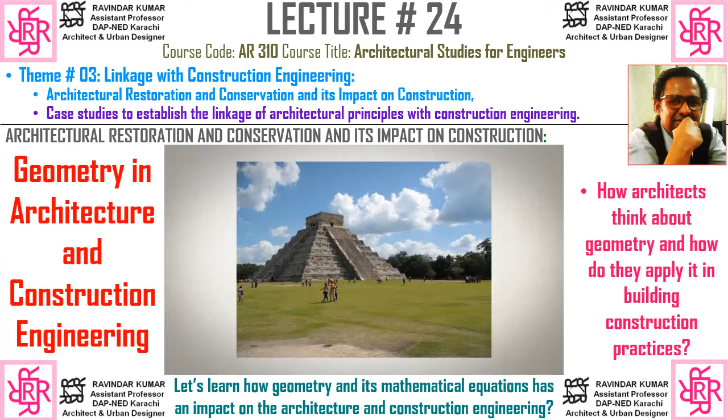The three figures of the plane: the triangle, the circle, and the square. Remember, in 2500 BC the pharaoh dreams of one of the wonders of the world, and through the creative line of the architect, the triangle becomes a pyramid, which is then repeated and redrawn throughout antiquity, the modern period, and the contemporary one.

And now the circle, a line whose points are equidistant from the center. Observe its simplicity. It draws a Ferris wheel, which becomes a landmark of the City of London, a huge mirrored cookie in Abu Dhabi, and a pile of pancakes in a new library in Sydney.

At last, the square. In a tri-dimensional world, the square becomes a cube or a cuboid. These are volumes that, through the ease of their representation, speed of calculation, and of execution, yield the most common shapes present in architecture.

However, architects' imagination didn't just limit itself to the basic polygons. Over time, architecture, geometry, and engineering weren't deprived of coming up with new shapes and setting new challenges of representation and calculation. To help us understand some fundamental curves, behold a right conical surface.

This conic surface is built based on a directrix, the circle of the base, and on the generatrix lines. Let's now section it. We position the intersecting plane, starting with a plane that will section all the generatrixes. We shall obtain an ellipse. If we straighten this plane, making it horizontal, we get a circle, which is a particular case of the ellipse.

Let's increase the incline. The intersection with a plane parallel to two generatrixes results in a hyperbola branch. If we continue to tilt the plane until it becomes parallel with the generatrix line, we obtain a parabola. A parabola is the flat curve defined as the group of points equidistant from a point and a line. It's quite simple actually. We come across this curve in everyday life, from shore to shore on suspended bridges in Portugal, the USA, and China.

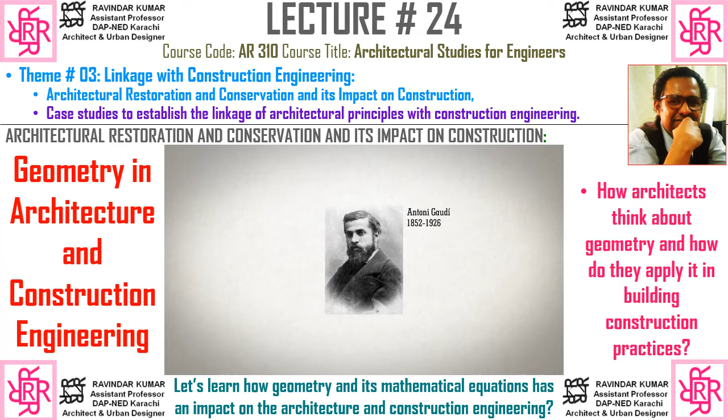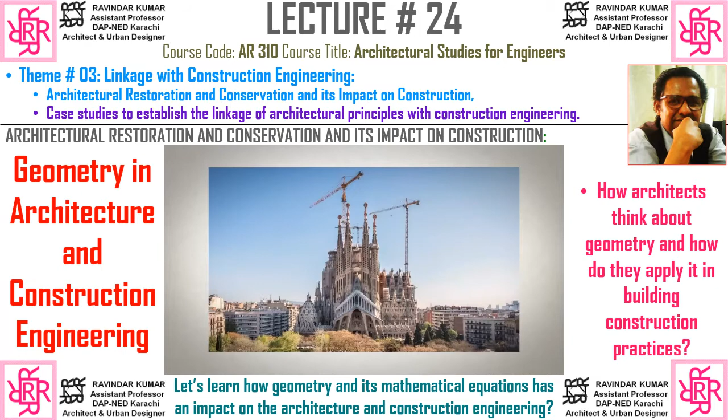Antoni Gaudí is one of the most famous architects in the history of architecture. His work primed the use of organic and naturalistic forms, which in itself set it aside from the then architectural tendencies. His greatest work of art, the Sagrada Familia, is still today, 135 years after its start, in progress. Gaudí had a passion and a knowledge for mathematics and geometry, which allowed him to develop new structural systems without recurring to calculations. He tested his stress models in scaled-down models, which he then applied in his work.

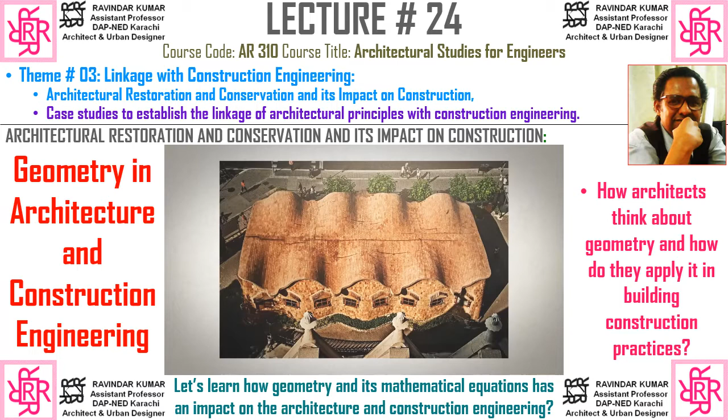Gaudí was the first architect to use conoids in his work. Presently, and in his honor, they are called Gaudí-ruled surfaces. Let's now explain how a conoid is geometrically generated. We shall use as the directrix a circumference D. We'll use a line segment E as an axis. And finally the line G will be the generatrix and shall lean on the axis and the directrix, moving through them and generating the conoid.

Let's make a second experiment. Instead of a circumference, let's use a sinusoidal directrix to generate a sinusoidal conoid, the conoid that Gaudí applied in the wall and roof geometry of the Sagrada Familia school.

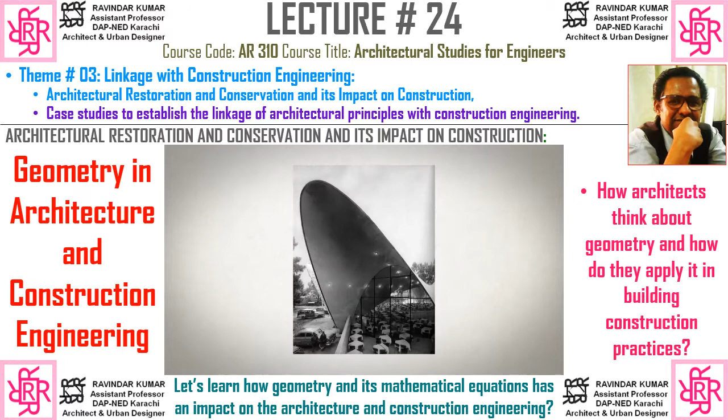Felix Candela was born in Spain, but at 26 he leaves for Mexico, where he takes up double citizenship. Candela had a special talent for geometry and a noteworthy attraction for surfaces called hyperbolic paraboloids, with which he frequently resolved his architecture. Candela sustained that the geometry of this surface generated the necessary rigidity to enable the construction of blades with minimum thickness, the so-called cascarones.

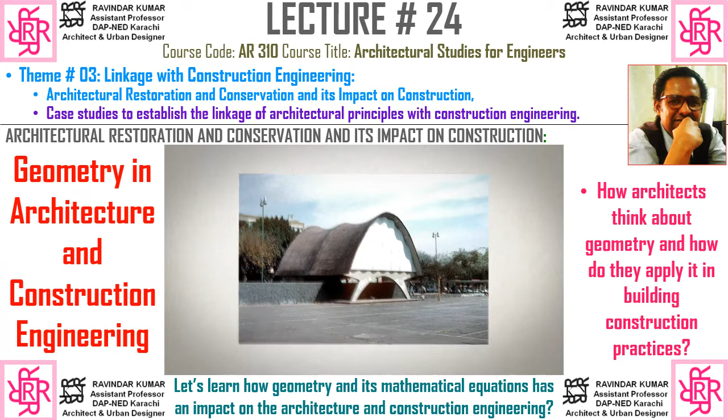Built in 1951, the Cosmic Rays Pavilion, a small laboratory in Mexico City, was his first work employing this surface. This membrane of concrete was only 1.5 centimeters thick.

So what is a hyperbolic paraboloid? Well, we'll need two non-coplanar lines, R1 and R2. Let's run a third line, G, through the other two. Now all we have to do is move the G line at constant speed through the R1 and R2 lines, obtaining the twice-ruled surface.

The hyperbolic paraboloid name is due to the fact that it has both hyperboles and parabolas as sections. Let's see. By sectioning this surface with the horizontal plane, we obtain curved lines which we verify as being hyperboles. Intersections with right planes will render parabolas.

Let's return to those three projects, Niemeyer, Gaudí and Candela, and our initial question. So after all, the answer that seemed apparent wasn't. The three buildings are in fact curved surfaces. True. But in history, we have just witnessed that these curved surfaces in particular are ruled. They are surfaces capable of being generated by lines.

In architecture, shapes, geometry and formulas entwine naturally from the idea to the construction. Mathematics is not an abstraction disconnected from reality, but a vehicle of the project. The creative design needs shape and rule. It needs a language that can provide its representation, calculation and execution. It needs geometry and equations.

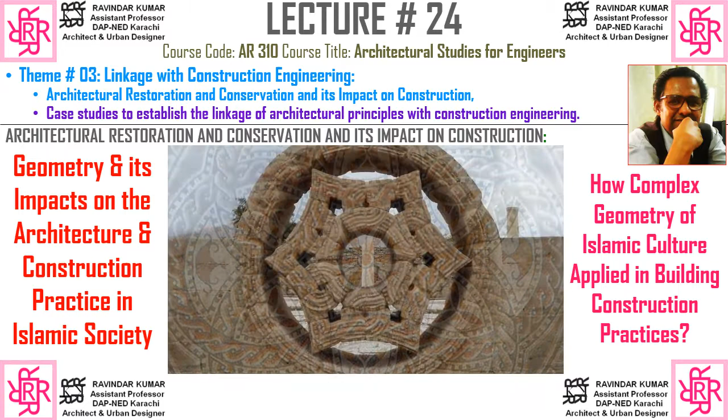This tradition began in the 8th century CE, during the early history of Islam, when craftsmen took pre-existing motifs from Roman and Persian cultures and developed them into new forms of visual expression. This period was a golden age of Islamic culture, during which many achievements of previous civilizations were preserved and further developed, resulting in fundamental advancements in scientific study and mathematics.

Accompanying this was an increasingly sophisticated use of abstraction and complex geometry in Islamic art, from intricate floral motifs adorning carpets and textiles to patterns of tilework that seemed to repeat infinitely, inspiring wonder and contemplation of eternal order.

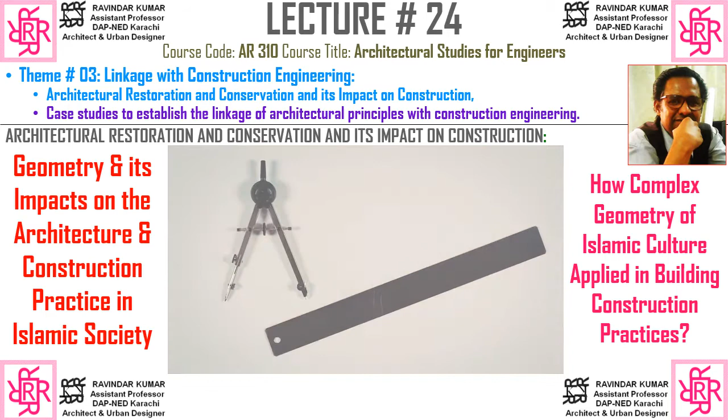Despite the remarkable complexity of these designs, they can be created with just a compass to draw circles and a ruler to make lines within them. And from these simple tools emerges a kaleidoscopic multiplicity of patterns. So how does that work?

Well, everything starts with a circle. The first major decision is, how will you divide it up? Most patterns split the circle into 4, 5, or 6 equal sections, and each division gives rise to distinctive patterns.

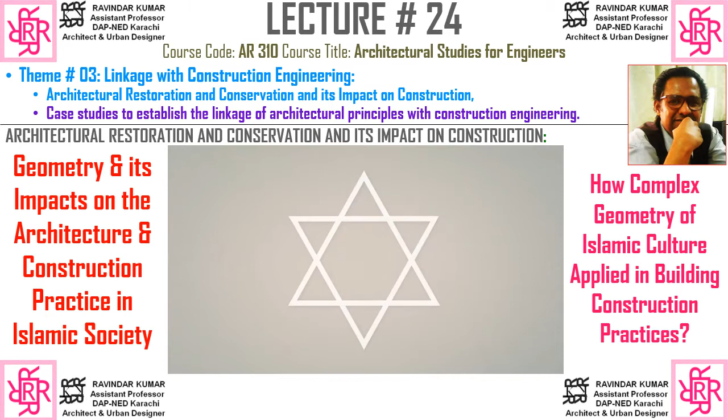There's an easy way to determine whether any pattern is based on 4-fold, 5-fold, or 6-fold symmetry. Most contain stars surrounded by petal shapes. Counting the number of rays on a starburst, or the number of petals around it, tells us what category the pattern falls into. A star with 6 rays, or surrounded by 6 petals, belongs in the 6-fold category. One with 8 petals is part of the 4-fold category, and so on.

There's another secret ingredient in these designs: an underlying grid. Invisible but essential to every pattern, the grid helps determine the scale of the composition before work begins, keeps the pattern accurate, and facilitates the invention of incredible new patterns.

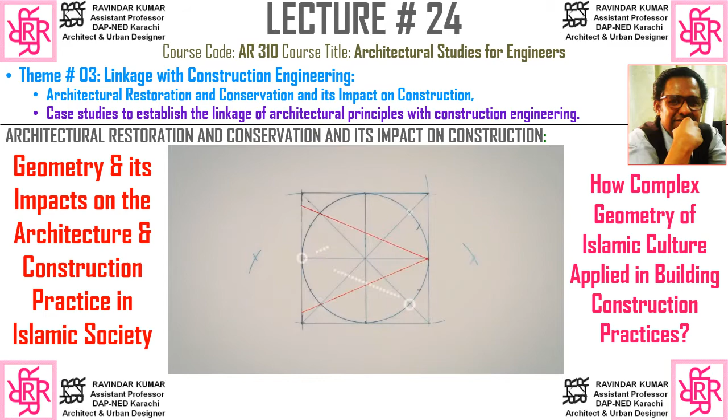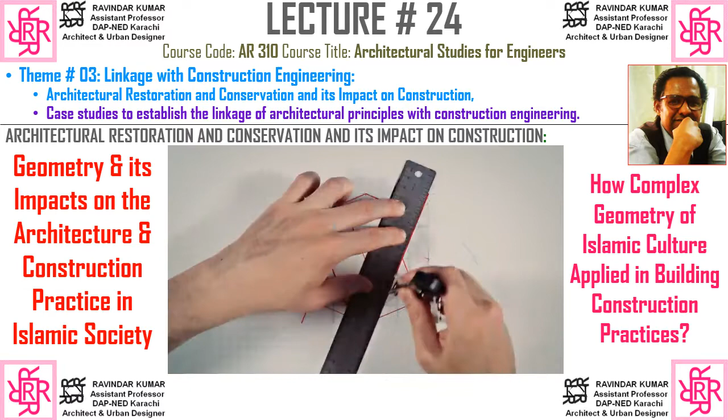Let's look at an example of how these elements come together. We'll start with a circle within a square and divide it into 8 equal parts. We can then draw a pair of crisscrossing lines and overlay them with another 2. These lines are called construction lines, and by choosing a set of their segments, we'll form the basis of our repeating pattern. Many different designs are possible from the same construction lines, just by picking different segments.

The full pattern finally emerges when we create a grid with many repetitions of this one tile, in a process called tessellation. By choosing a different set of construction lines, we might have created this pattern, or this one. The possibilities are virtually endless.

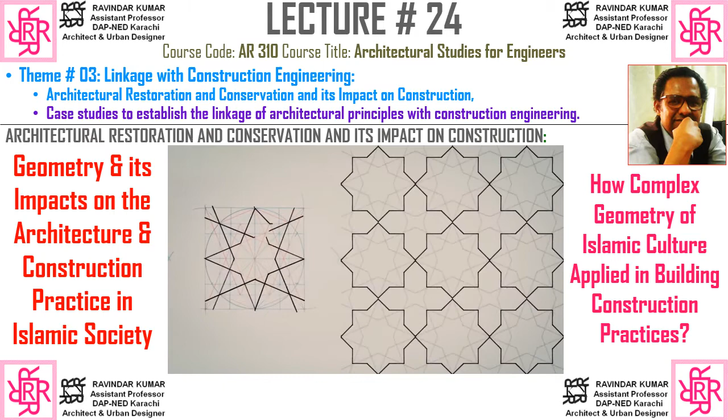We can follow the same steps to create six-fold patterns. By drawing construction lines over a circle divided into 6 parts and then tessellating it, we can make something like this. Here's another six-fold pattern that has appeared across the centuries and all over the Islamic world, including Marrakesh, Agra, Konya, and the Alhambra.

4-fold patterns fit in a square grid, and 6-fold patterns in a hexagonal grid. 5-fold patterns, however, are more challenging to tessellate because pentagons don't neatly fill a surface. So instead of just creating a pattern in a pentagon, other shapes have to be added to make something that is repeatable, resulting in patterns that may seem confoundingly complex but are still relatively simple to create.

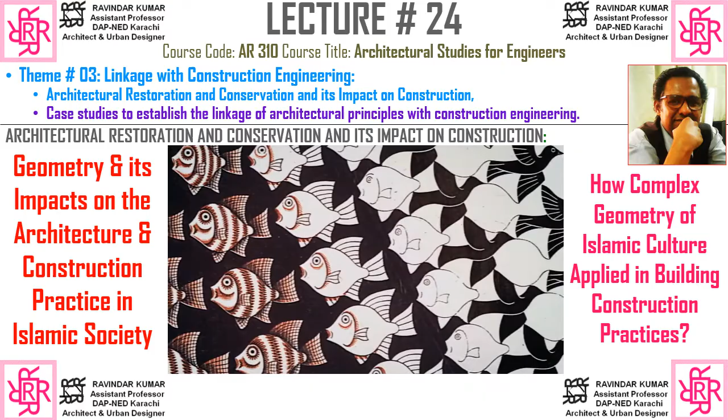Also, tessellation is not constrained to simple geometric shapes, as M.C. Escher's work demonstrates. And while the Islamic geometric design tradition doesn't tend to employ elements like fish and faces, it does sometimes make use of multiple shapes to craft complex patterns.

This more than 1,000-year-old tradition has wielded basic geometry to produce works that are intricate, decorative, and pleasing to the eye. And these craftsmen prove just how much is possible with some artistic intuition, creativity, dedication, and a great compass and ruler.

So you have seen how geometry has affected the overall patterns in the buildings, and construction of these patterns is very important to be understood by construction engineers. There is a great impact of Islamic geometrical patterns on architecture and construction engineering practice in Sindh, and we can see some examples of it.

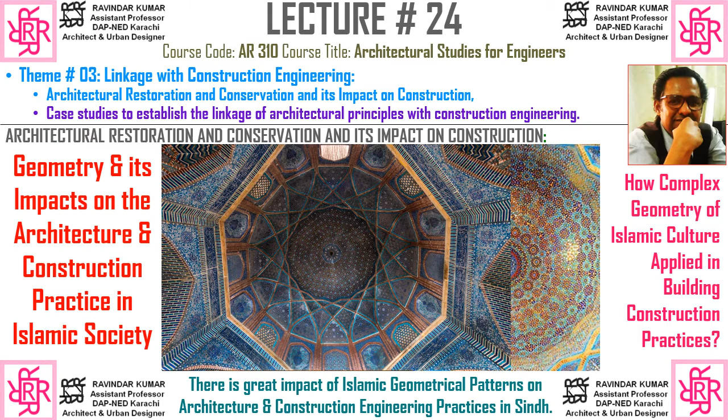I can give you so many examples from Sindh where you find this kind of architecture, and the internal spaces are decorated and designed in a manner that geometry is very much applicable in our local context.

Let's look at another example: the case study of building a Moroccan court. We will understand how construction engineering practice has a profound impact on architectural restoration and conservation. There are specialized construction engineers and families who work in this field, and whole families dedicated to such projects. Let's see this case study to understand what I'm talking about.

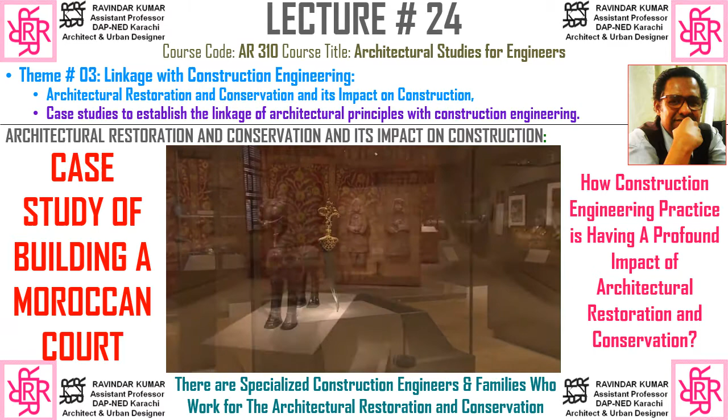In 2011, the Metropolitan Museum of Art opened new galleries for its Department of Islamic Art. As a curator, I knew our visitors would experience extraordinary works of art created over the last 1400 years. But we also wanted to give visitors an experience of space and architecture, and to show something of the living traditions in the Islamic world.

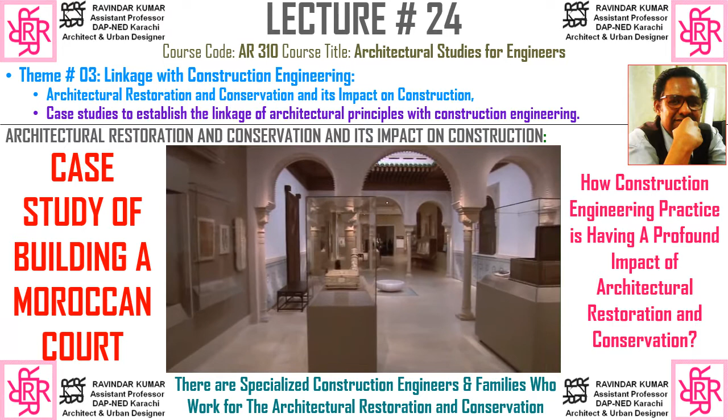The result is the Patti Cadby Birch Court, a Moroccan court built inside the Metropolitan Museum over several months in 2011. It took a team of experts, from curators and historians to designers and craftsmen, to make the Moroccan court using traditional methods that go back to the 15th century.

Our work began with a journey to Fez. The world has changed so much and traditional crafts are dying out very fast. But to the credit of the Moroccan government, they've taken this so seriously over the years that they've managed to preserve in Fez and other centers the traditional methods.

Being so close to the moment of creation has an incredible power, and it's something that profoundly moves you as a curator.

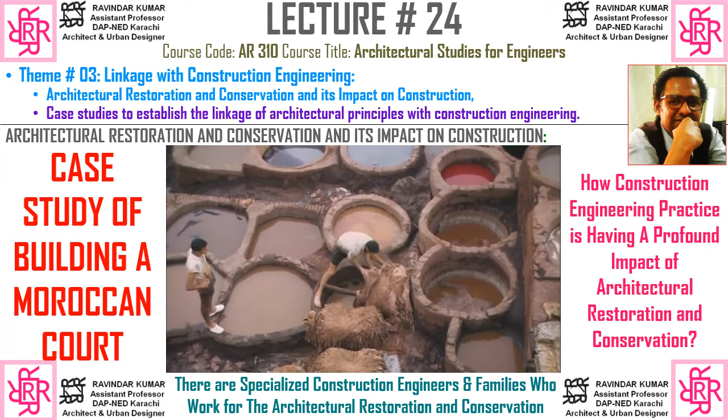In Fez, there were 40,000 craftsmen. We met with many guilds and many groups, and found potential to work with a number of different people. However, it was when we met the Naji family craftsmen, run by four brothers and their father, with several workshops in Fez itself,

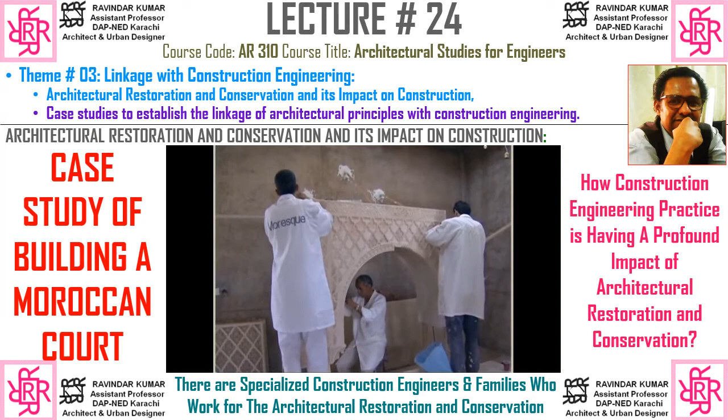that at one point Rida picked up Muhammad's hand and said, 'Look, this is my brother's hand.' We looked at that hand, and it was the hand of a craftsman. It was rough and calloused, and had plaster all over it. He'd been chipping away since the age of 14. It was one of those moments when you just felt this was the right partner for you.

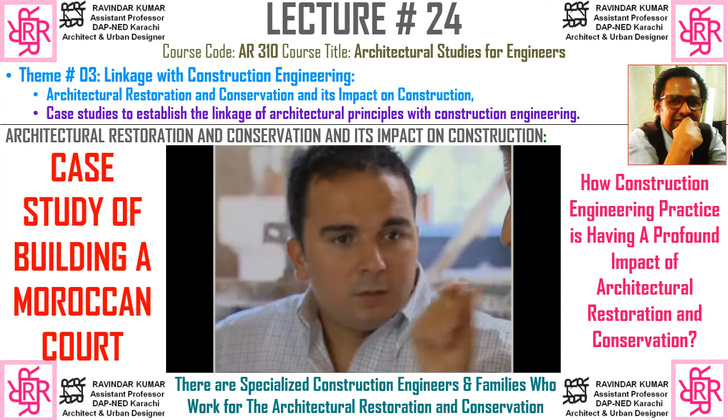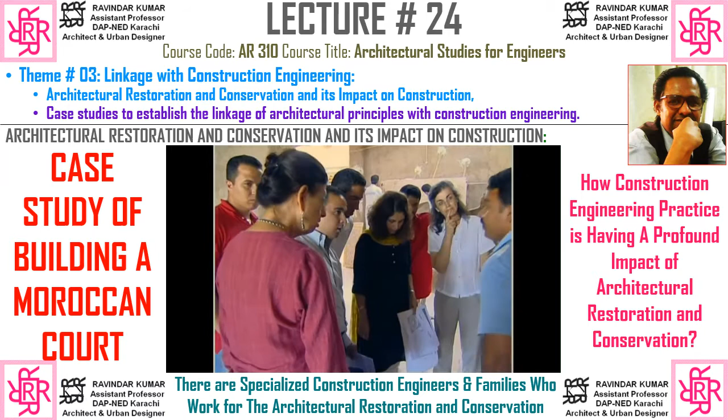We are seventh generation in this business, but for me and my family, it's unlike any other project we've ever undertaken, because this will serve as a reference for scholars to learn more about Islamic architecture.

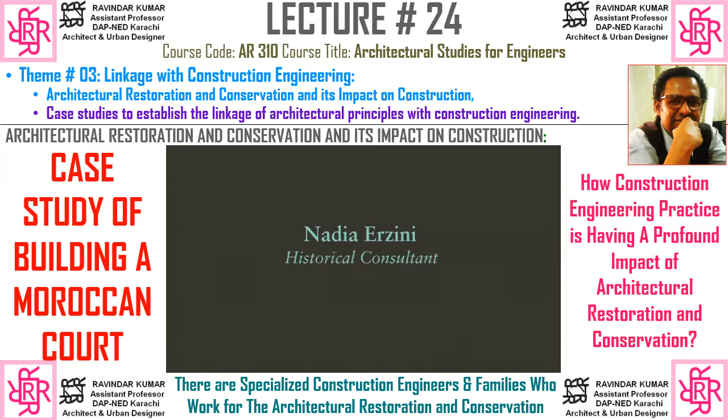I was employed as an art historian consultant to the project. I suggested having a medieval style courtyard. I have a very personal reaction to cut tile mosaic, or zellige.

Morocco, North Africa, is burning hot for so many months of the year. Visually, it's such a comfort to see blues and greens and cool colors, evoking nature, gardens, and water. Perhaps it's because I grew up in a courtyard house with traditional decoration. I can remember walking barefoot on tiles.

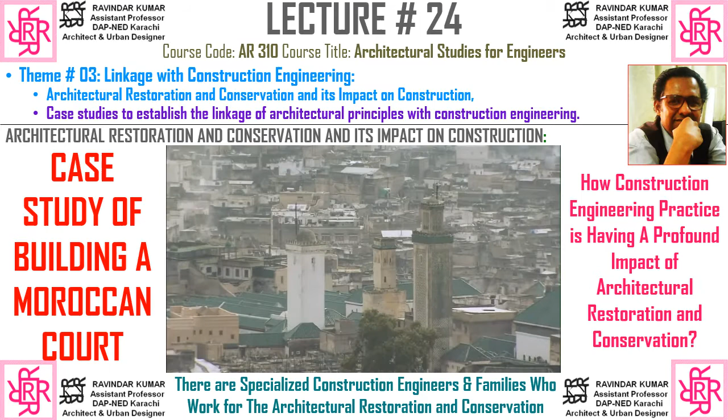In the Islamic city context, there is no facade. Houses are all stuck together, the streets are very narrow. The courtyard is the focus — it's in fact the facade, but it's on the inside, and it's very private unless you've got access to it.

The Moroccan inspiration for the courtyard is the madrasas of Fez, perhaps the best symbol of the intellectual and cultural life of the medieval Western Islamic world. The madrasa was a residence for students who formed the backbone of the education and political life, which would then serve to maintain the urban civilization as they knew it.

As a designer and landscape architect, I deal with outdoor space. When Navina came to me, she said, 'Do you think we can do a nice Moroccan courtyard?' And I said, by all means.

Most people who go to Morocco and look at Moroccan architecture look at the court in terms of objects — the beautiful tile, the beautiful wall — but they don't look and see the space, the outdoor space, and the meaning of the void and the mass. You see how elaborate it is, but how simple it is.

Traditional Moroccan architecture in general consists of a pretty formulaic set of materials that go from floor to ceiling. There's usually a marble basin, tiles surrounding on the floor, extending into stone, and then you reach the walls, which have a dado level of tile work, followed by elaborate carved stucco work, then woodwork, and after the wooden ceiling it culminates in a set of green roof tiles.

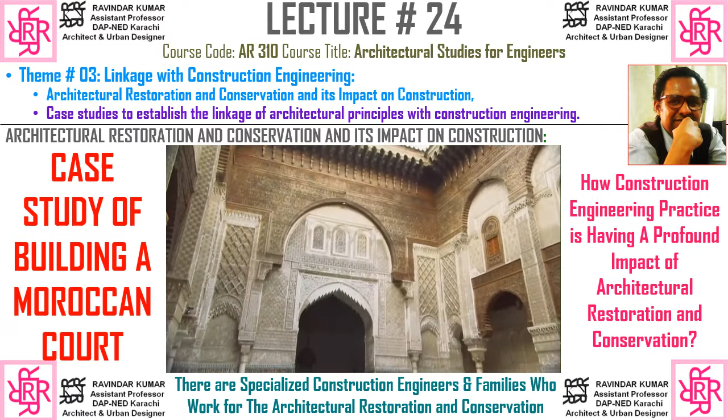What precise patterns, designs, and colors do we put into this formula, and how do we adapt the scale of these courts that usually go on for three stories into our very intimate setting, without losing the spirit of the court?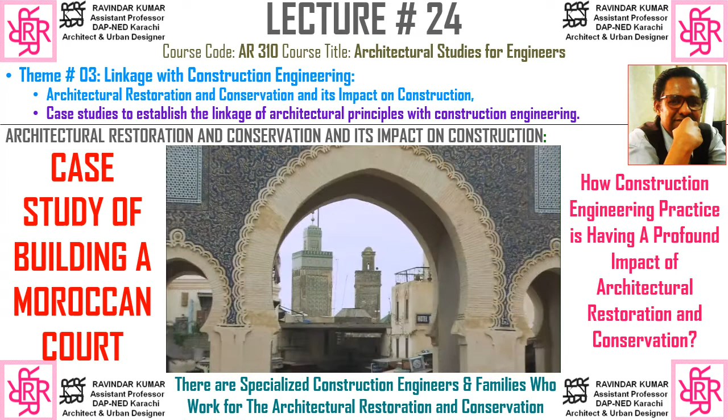What we've done is combine elements from the madrasas and houses of Fez and from Islamic Spain, houses and palaces of Granada. At that period, you can look at the Western Islamic world as one cultural unit, with craftsmen moving around between cities. So we looked at a tile panel from the Alhambra, which was exhibited at the Met in 1992.

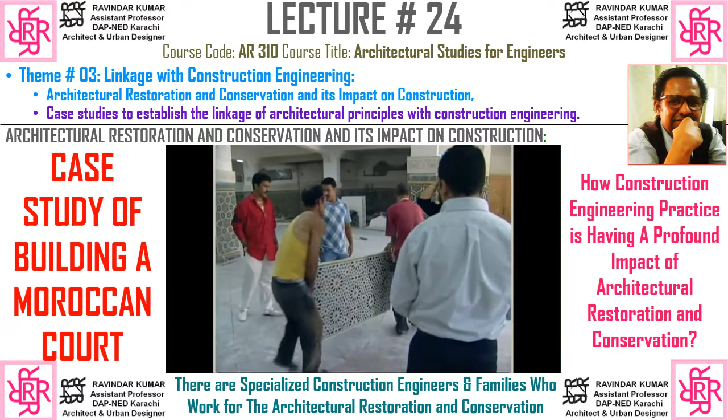It's very bold. If we were to adopt the scale exactly, we would end up with very big stars all over our walls. And we found that in general, the scale in Moroccan monuments is much smaller than the Alhambra patterns. So the challenge was, how were we going to reduce the width of that white strapwork to make it suitable for our scale?

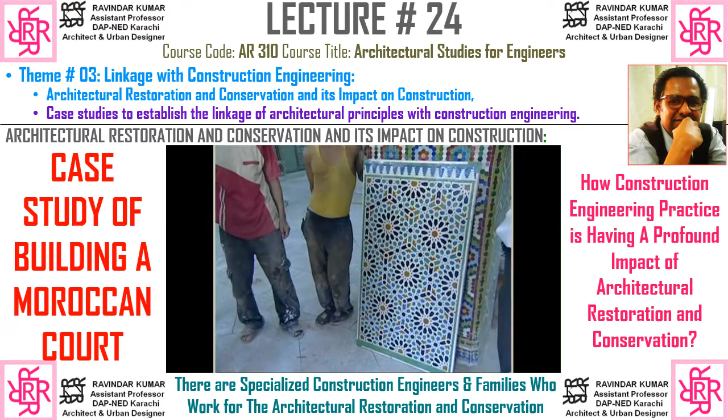The incredible thing we learned is that if you add a millimeter of width to your white strapwork, your stars become huge. If you take a millimeter away, they become small. It's incredible how much effect the width of the strapwork has on the overall pattern.

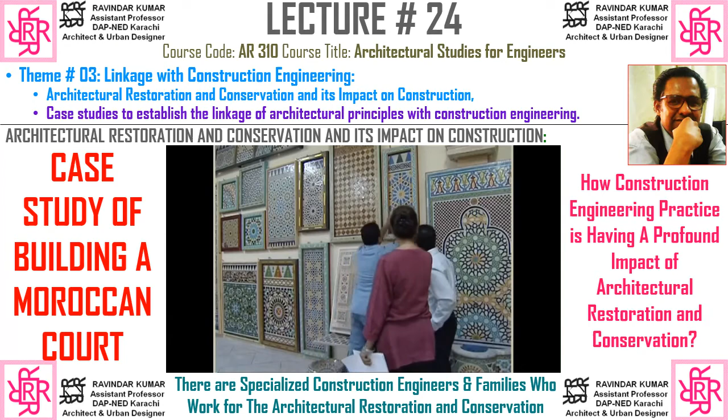In the end, we were all in Morocco, in the workshop, trying desperately to make this work out. The craftsmen themselves wanted to make it smaller. I was holding out for as much white as possible and not able to do it on the computer. We tried painting it on the wall, we tried printing it out in various stages.

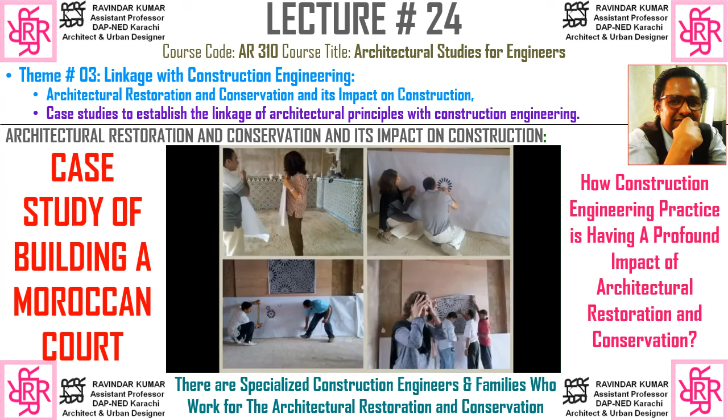In the end, Achva Stein, our designer, took scissors and cut pieces of star and strapwork out and physically created a pattern to show us how the scale could be adapted. It was a very medieval solution in the end, and it was a very exciting moment in the whole thing. You had to see the totality, the shape, the form, and the location.

When you look at the wall, you see there are 70 different distinct pieces, like a puzzle fitting into each other to create the design.

We were working in Morocco for almost 6 months, in which we fabricated all the loose tiles for the zellige.

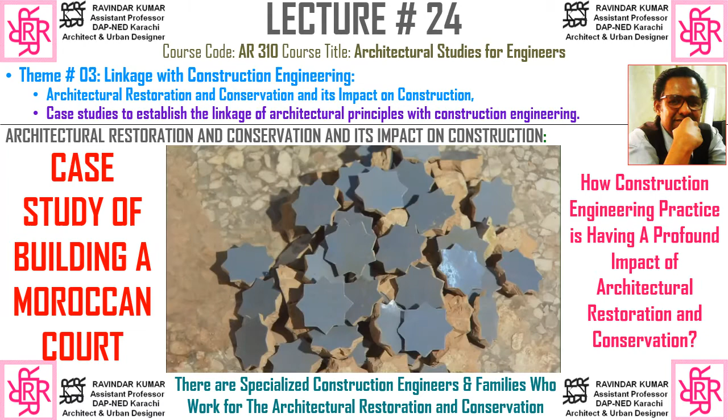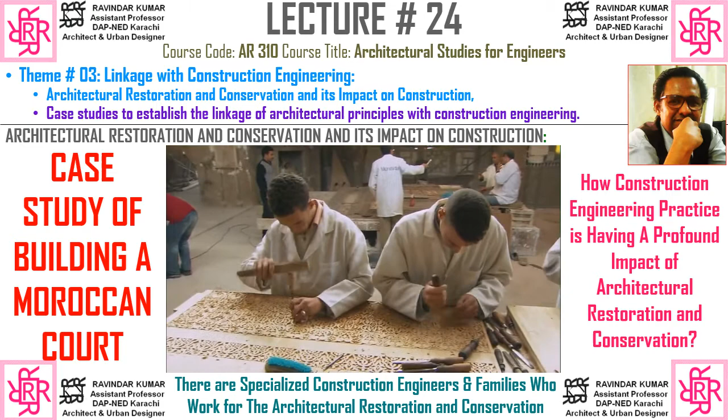The wood was carved in Morocco out of cedar from the Atlas Mountains of Fez. We used some of the best wood carvers in the city, and it was very difficult in terms of the intricacy of the pattern. We were convinced that the only way we would do this project was if the craftsmen actually came here.

We wanted a direct relationship between the craftsmen and the walls of our Metropolitan Museum.

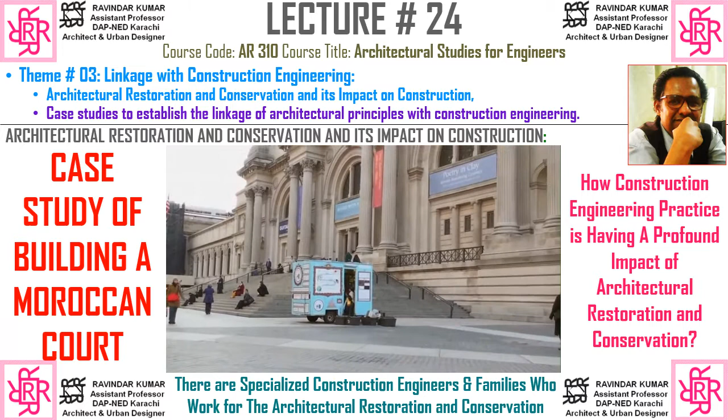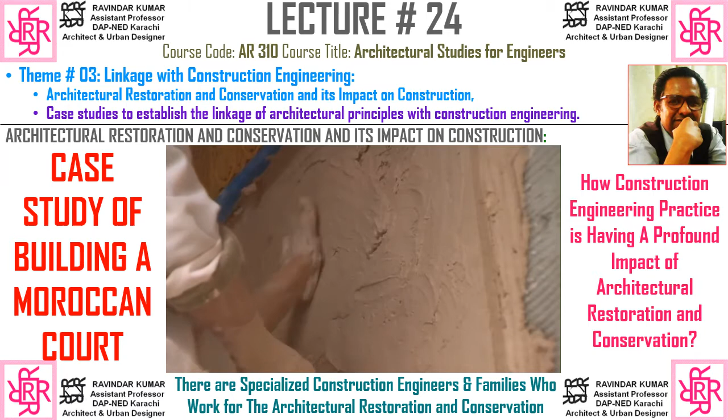For us, we were transported back to the year 1300. It was clear to my team that we had to use only the elements and the tools that have been used for centuries. For instance, the plaster on the walls, they were smoothing it with their hands. When I look at this court, I see hands everywhere. Everything is touched by hands.

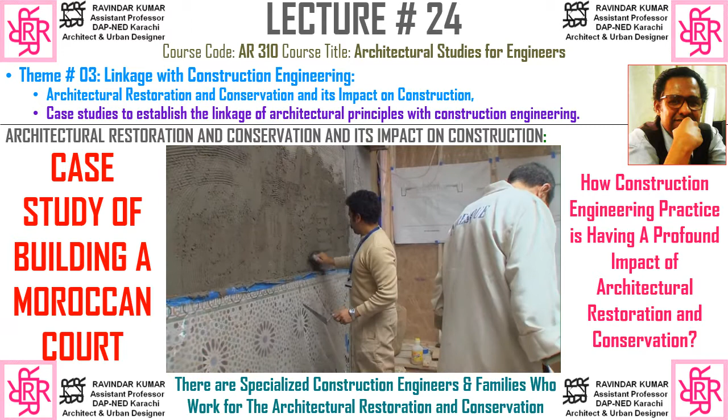The Moroccan court exists in many contexts in Morocco, in a domestic setting, in a religious setting, and in a public setting as well. The inspiration came from all of these different types of courts coming together.

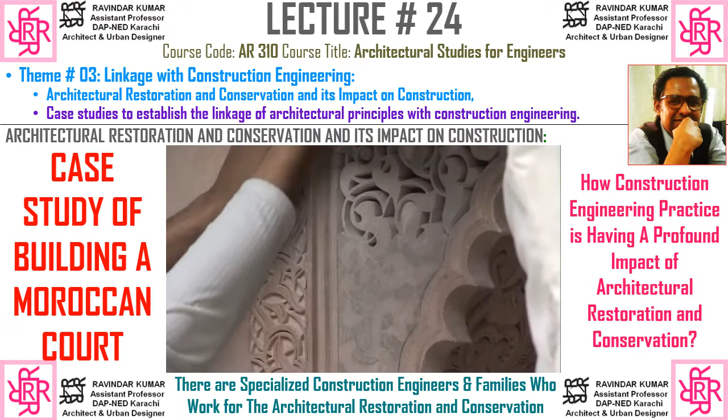Without making a historical reproduction, we wanted to be historically authentic. We had to do things very close to the original way. So we had to scale things down very precisely so that your eye wouldn't feel that things were wrong. Your eye has to have a sense of complete harmony when you look at these elements.

The government of Morocco, for our project, released a special kind of stucco which they don't normally export. It's got a wonderful reddish hue, and you see this reddish color in Marrakesh particularly. Through the process of carving, they have to keep it moist, and it retains this soft and malleable quality for months afterwards. In fact, it's very fragile until it completely hardens.

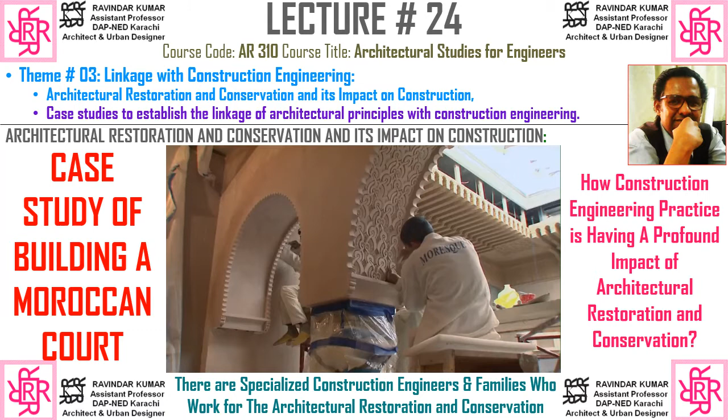What's incredible is that if you make a mistake or you want to change something, you can just slap some more plaster on and shape it and carve it. It's got a kind of soft quality, and at the same time it hardens just enough so that when you need to get your chisel in there and make it into definite shapes, you can do that as well.

And then they have a series of tools. Some of them are as fine practically as toothpicks. And with these tools, they apply themselves to carving the surface of the stucco based on stencil designs that they have applied.

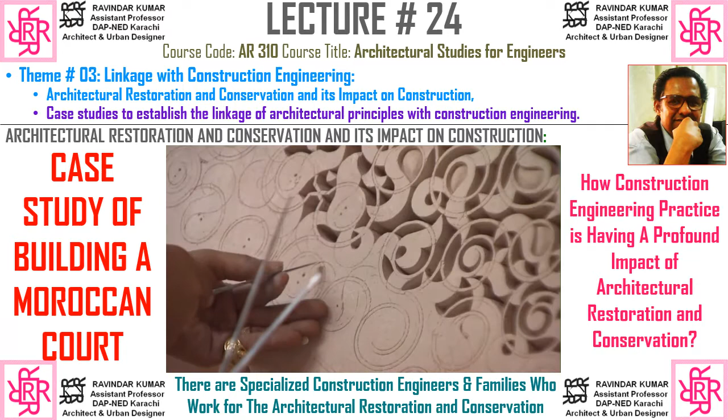There is a movement to the whole nature of the carving. They are able to create effects of leaves going over vines, under other leaves. They are extremely sculptural. It's an arabesque almost in three dimensions.

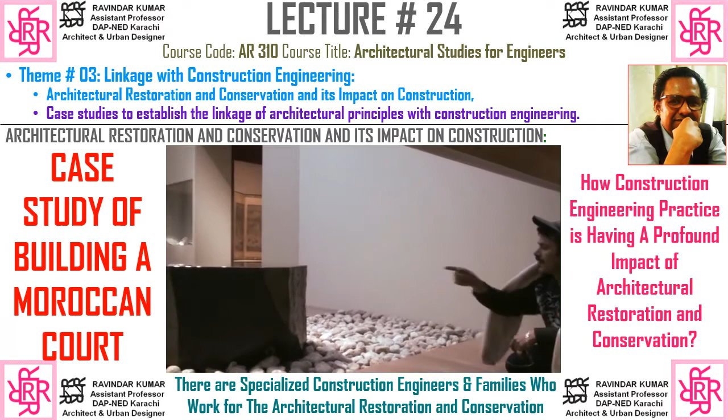Living in New York for them was a challenge. I took them on a tour of the museum, and I took them to places to see what has been done before. The routine for 6 months was Monday to Saturday, and Friday we work until 3 p.m., and then they go sightseeing.

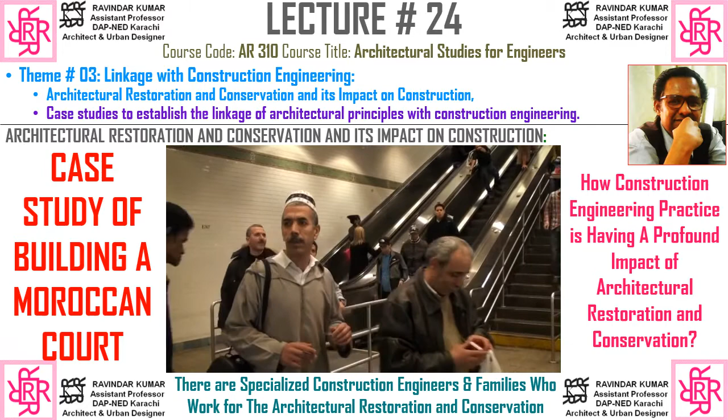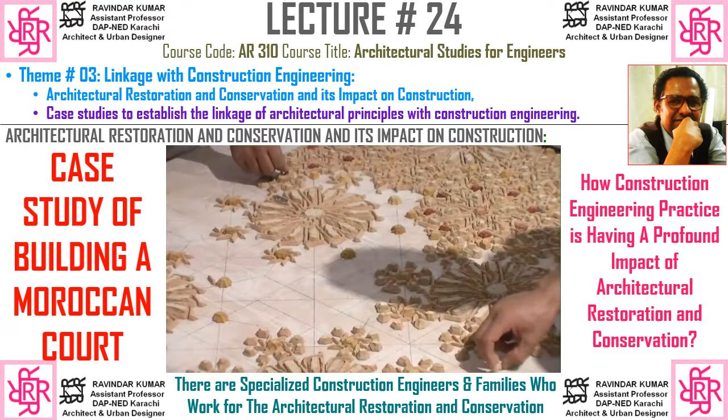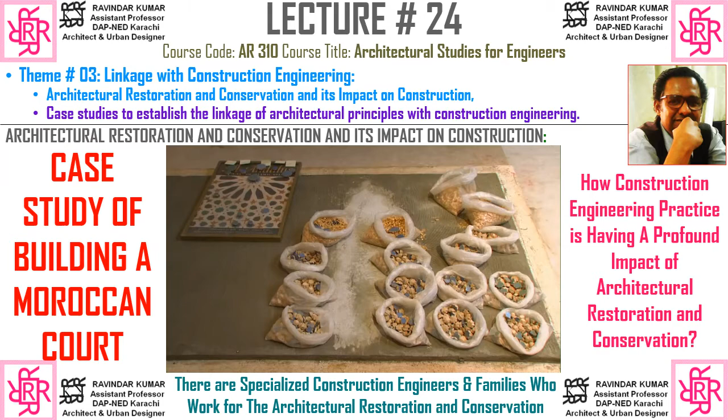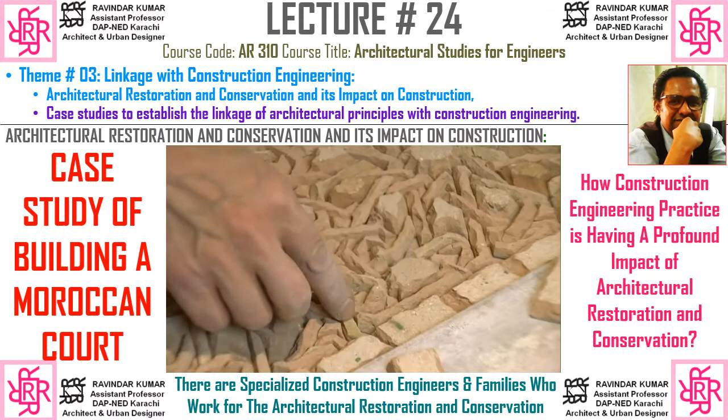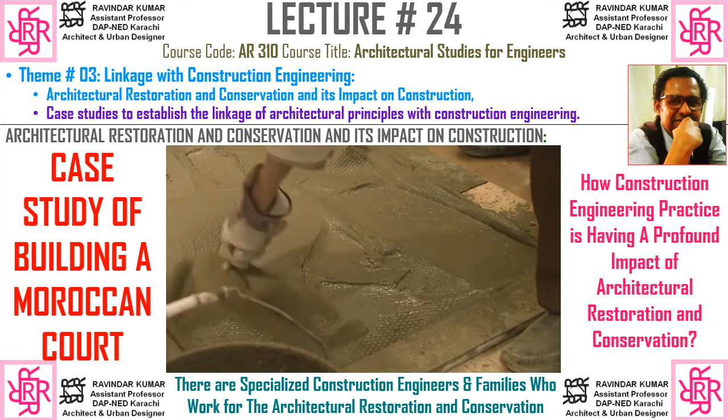In the old days, creation of these wall patterns would have been done with a lime-based mortar and done directly on the wall, but it burns through the skin and causes horrible injuries. So what they generally do now is create an intricate mosaic tile pattern on a floor, upside down basically. The surface of these shapes is colored, smooth and brilliant, but the reverse has to be cut into a particular beveled style so that they interlock well with each other. Then they pour in a cement-based mortar, which allows it to get completely solid.

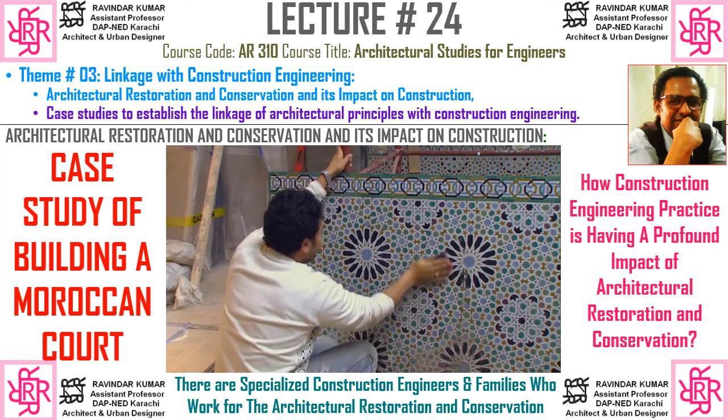We had to get some variation of colors. For instance, 3 shades of blue, 2 shades of green, so it has the characteristic of an ancient antique panel. We match the colors right back to the authentic palette of the 14th and 15th centuries.

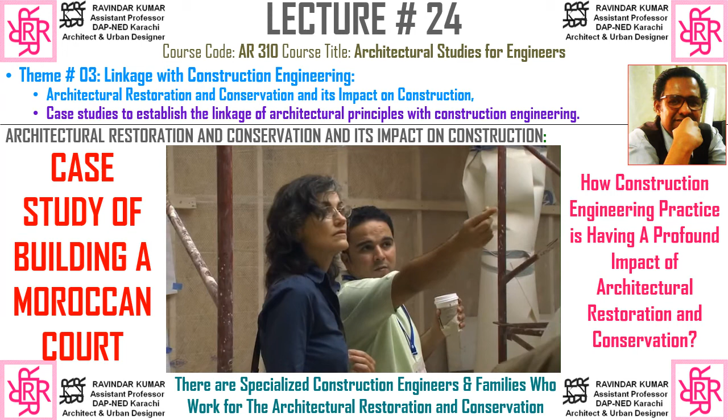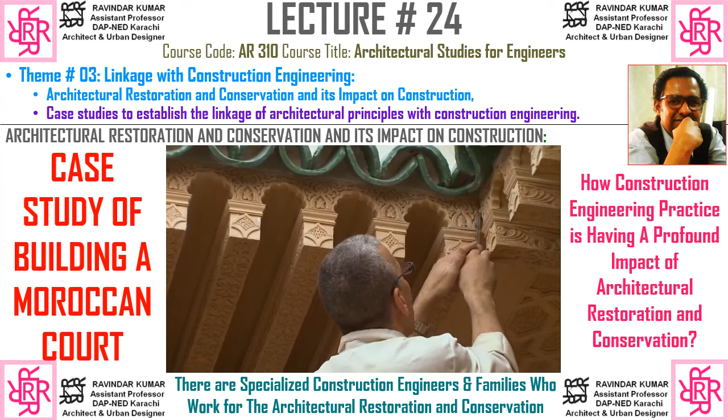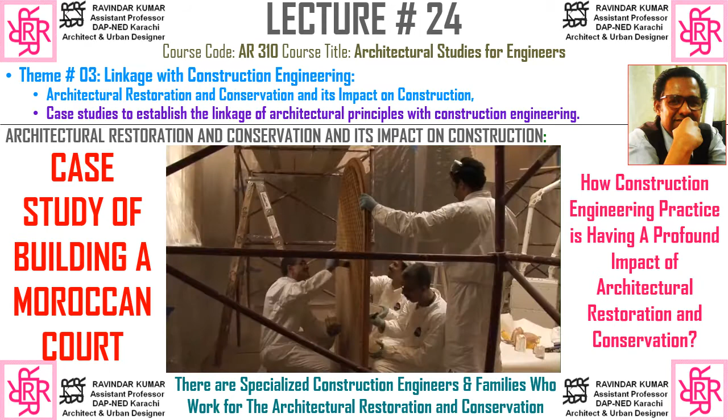There seemed to be a standard type of ceiling that was used for the madrasa courtyards of Fez. We thought that worked because it was so 3-dimensional and exciting. It has those projecting corbels that really add a bit of life to the surface. Although, of course, we've had to miniaturize the whole thing because we don't have much space - it's a completely different scale. We needed to make the room in a proportion that will be adaptable to human scale, yet hint at the grandeur of Moroccan Andalusian style.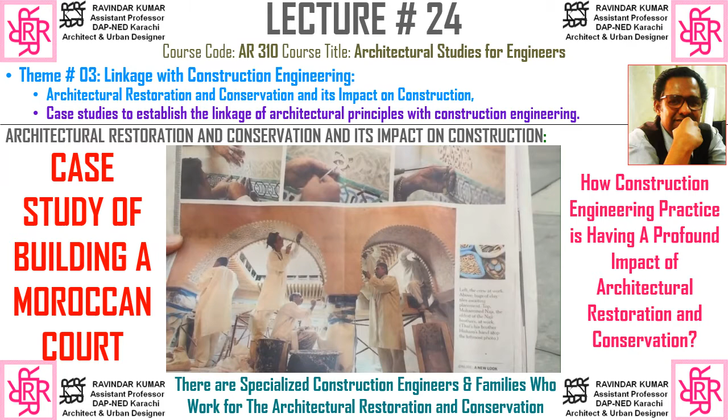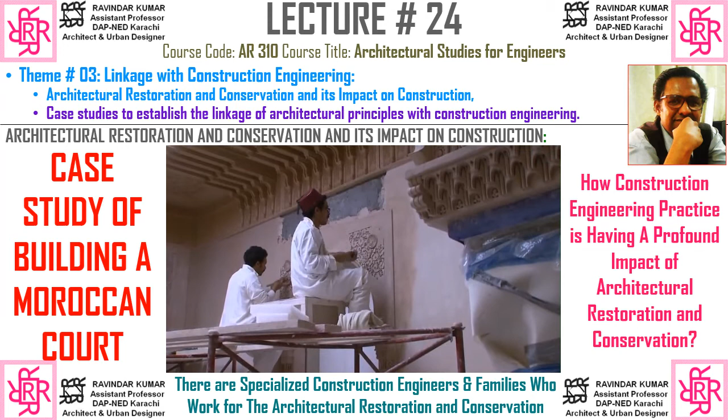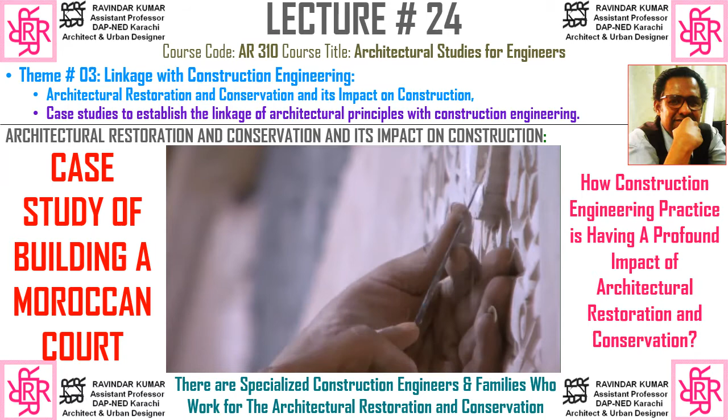When the New York Times wrote about us, they were carrying the newspaper with them every single day. They became celebrities, and it definitely gave them the fuel to go above and beyond their capabilities. At certain points they actually departed from the design because they were so inspired to do better. Muhammad said, I'm going to leave the design aside and do something for you that I've never done before - a freehand drawing based on historical precedent.

They have to have mastery over the symmetry and the geometry of these patterns, and it's the interlocking of these simple forms that leads to the complexity of the surface decoration that you see. It's very mesmerizing - no matter how stylized it is, there is an underlying logic that does not break down. That's an important part of the heritage that they are keeping alive.

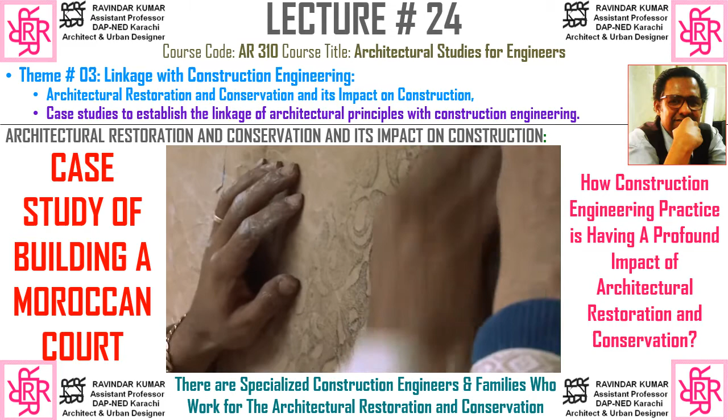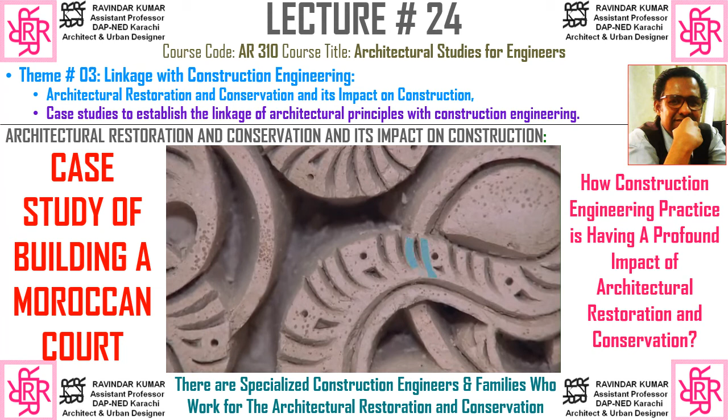Most craftsmen all over the Muslim world tend to be Sufis, and much of the work they do reflects a kind of devotional spirit. For example, the craftsmen actually stylize the veining of the leaves to reflect the name of God. Allah, in Arabic script, is written essentially in a series of vertical strokes terminating in a rounded form - a very understated element in the decoration, but if you want to see it, it's there.

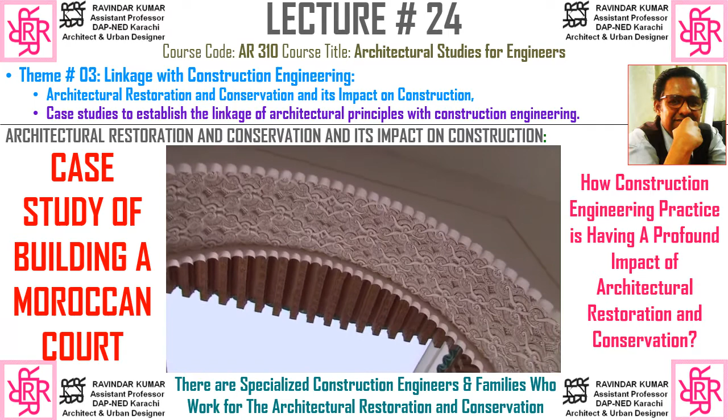To acknowledge that these spaces and this work has a spiritual dimension to it only enhances it and makes us understand how human beings are capable of doing things that require such dedication.

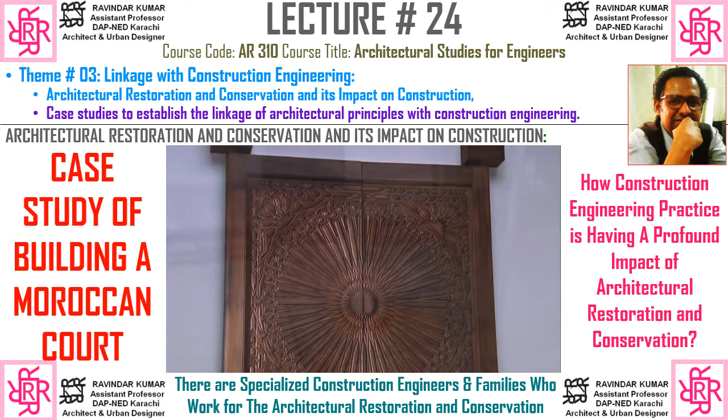I think it's wonderful that people can visit a recreation of a medieval Moroccan courtyard without having to go there - it's a real privilege for us as Moroccans. This place is a constant reminder of harmony between two different cultures. The strength of Moroccan design is to understand the beauty of the simplicity of the old world.

The Moroccan court will join a family of great spaces in the Metropolitan Museum, spaces that offer an area for contemplation, that transport the visitor to a completely different part of the world, and do this at the highest possible level with the greatest sensitivity to the surroundings and the masterpieces of the collection. It's a historian's dream - a chance to actually be part of the act of creating something wonderful.

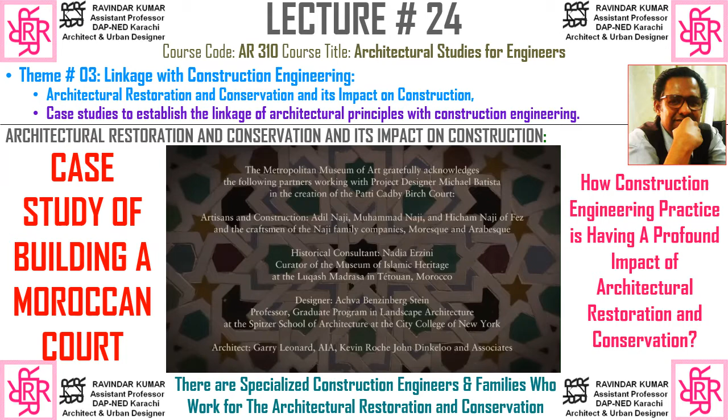Realize what kind of impact it has on construction practices.